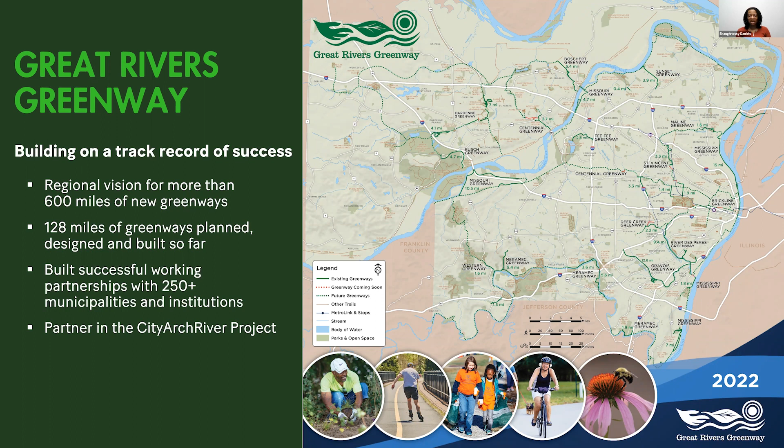The Brickline Greenway envisions not just a path, but a movement for the region. This project encourages ownership from everyone and focuses on inclusive planning and collaborative decision-making. With hundreds of partners involved in planning efforts, including you, community voices drive design. The Brickline Greenway is designed to connect us, bringing everyone to the collective table.

This is a project built by St. Louis for St. Louis, and it is built to have great impact in and for St. Louis, from quality of life and environmental excellence to being a catalyst for jobs and economic development opportunities. The Greenway intends to tangibly and concretely make our city and our entire region stronger.

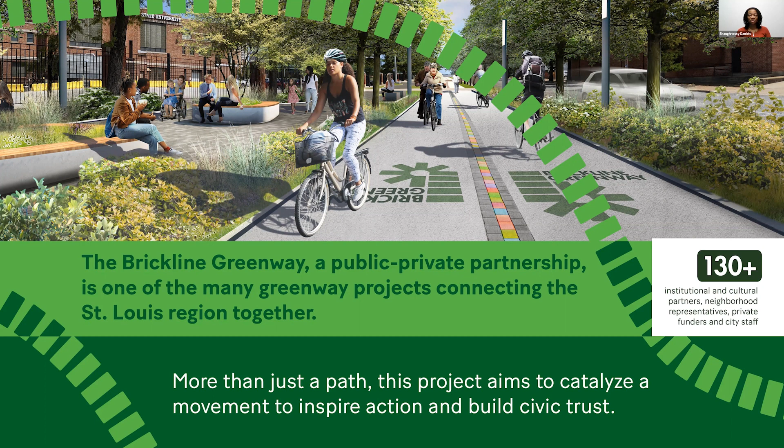The Brickline Greenway intends to connect Forest Park to the Arch and Fairground Park to Tower Grove Park, hundreds of destinations and 14 St. Louis City neighborhoods in between, with more than 10 miles of greenway. Great Rivers Greenway is in the process of planning, designing, and development of several segments, including the North Connector. My colleague Lonny Boring will tell you more about the Brickline Greenway North Connector.

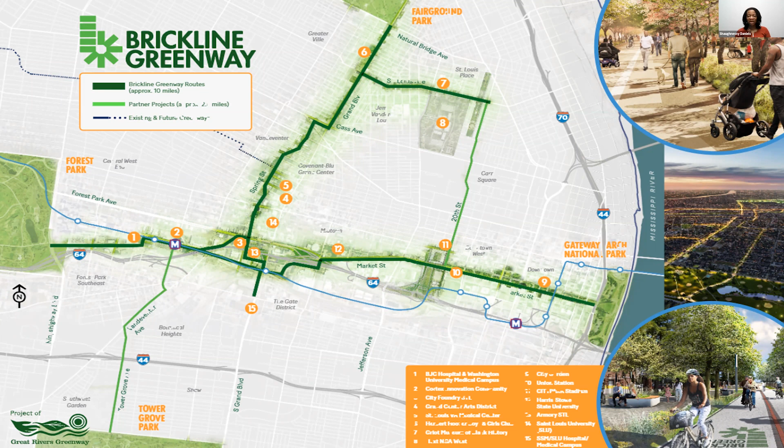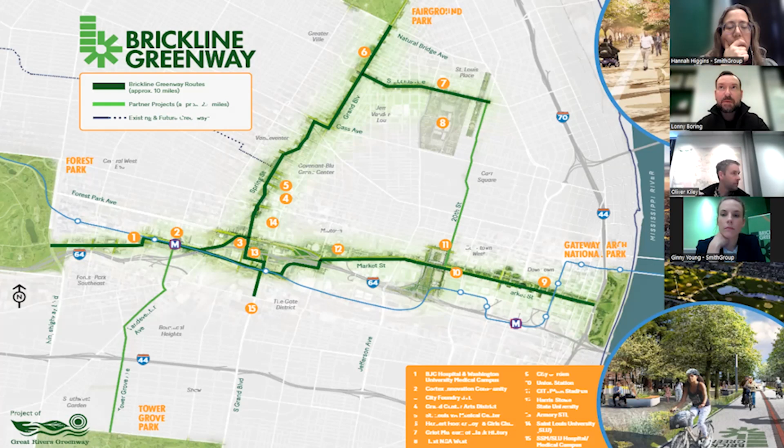All right, well, good evening, everyone. The North Connector project of the Brickline Greenway is one of critical importance for us, largely in part because we have so many multiple partners working in this area, and our extensive community engagement really highlighted this area as one of the first and early action items for the Brickline Greenway.

It begins at Fairground Park in the north, travels south on Grand Boulevard to Cass, where it makes a quick jog over to Spring Avenue before continuing south down Spring Avenue, eventually connecting with St. Louis University campus, and ultimately all the way to the Midtown area and the Grand Metrolink station.

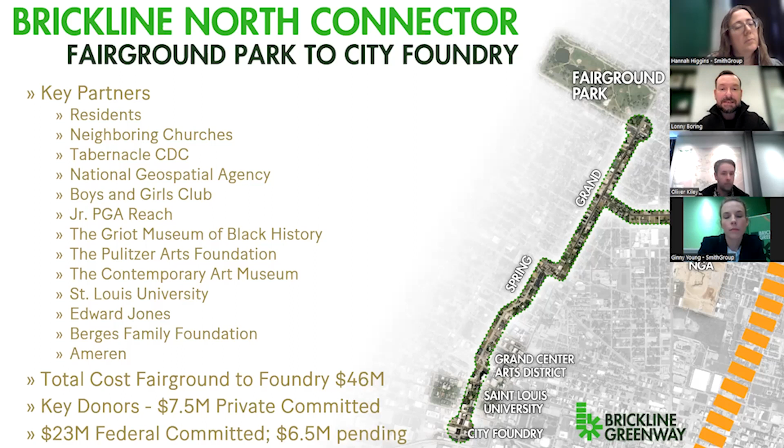A few of the key partners are listed here on the slide, and the funding for this project is coming together piece by piece. Total estimated cost in this corridor is approximately $46 million, but we've already had private commitments from donors totaling nearly $8 million, and we've been extremely successful in securing federal funds as well, with over $23 million committed to date. Next slide.

As we continue to assemble the funding for the project, happy to report that Phase 1 between Fairground Park and Page Boulevard was awarded $15 million in a federal program called the RAISE Grant.

So that was a great success for the project that came about in November of 2021. That created phases for this North Connector between Fairground Park and the Grand Metrolink station. But GRG and our partners have continued to seek out federal funds for those phases, and happy to report that...

Along Spring Avenue between Page Boulevard and St. Louis University, we've secured an additional $6 million in transportation alternative funding and $2.5 million for community project funding through former Senator Blunt's office. St. Louis Avenue is listed here. It's approximately $12.9 million. Thank you, Lonny.

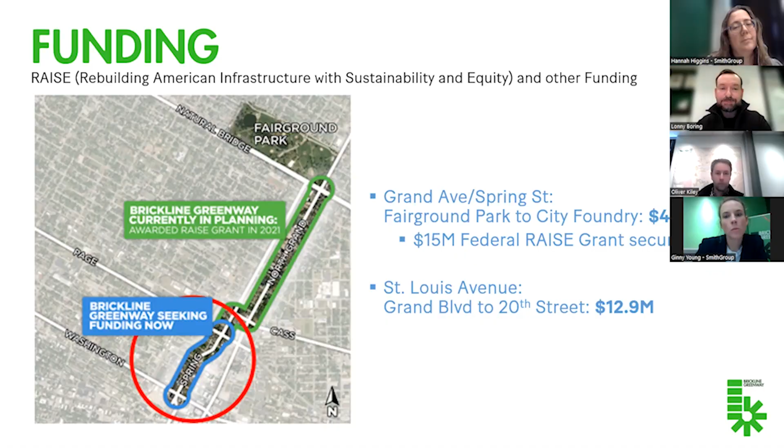Work in this segment was launched on an engagement platform. We have been in the community listening to your needs and concerns since 2020. We've engaged a working group and community advisory committee to help drive the work, and we continue to conduct regular engagement activities in the community to make certain people are aware of the project and have an opportunity to participate. I would like to acknowledge all of our former and current working group members and advisory committee members who have given so many hours of their time to see this project to fruition. Thank you all.

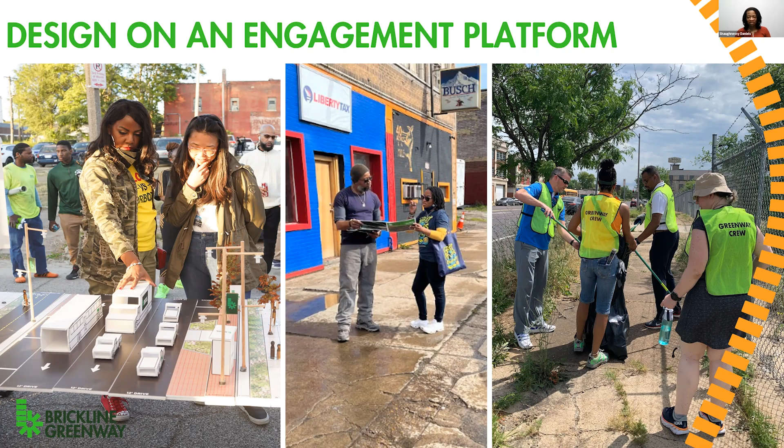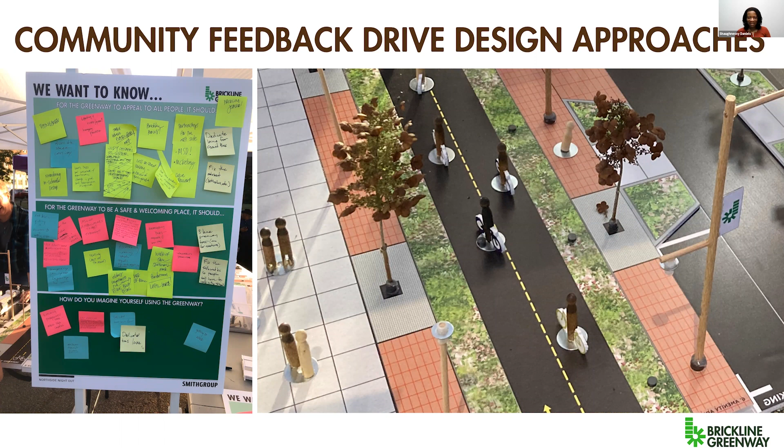Community feedback informs and drives design. What we hear from the community is the basis for the design team's work. This is why it is so important that we hear from you, not only right now, but throughout the entire Greenway planning, design, and development process and beyond. So without further ado, let's meet the design team and learn more about the design for the Brickline Greenway North Connector.

So let's talk about what we heard during this design process. Hi, my name is Hannah Higgins. I am a project manager with SmithGroup, leading the design for the Brickline Greenway North Connector. And we want to share what we've been hearing from everyone.

As Shaughnessy mentioned, we've had a lot of great events happen recently. We've had the Northside Night Out, we've had community mailers go out. We were even out having open office hours early in January. This is not stopping, this will continue on. We've got tonight's meeting, we have the online survey that was part of the mailer, and we'll continue to update that with new questions as the project moves forward. We've got some fun events planned for April, and we'll also come back to the community in June.

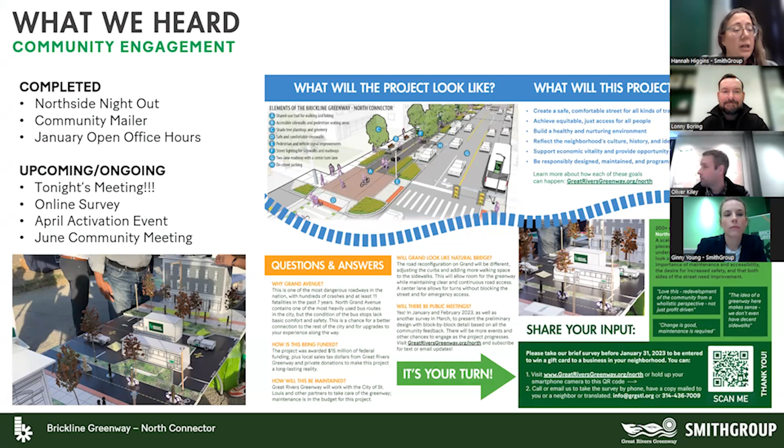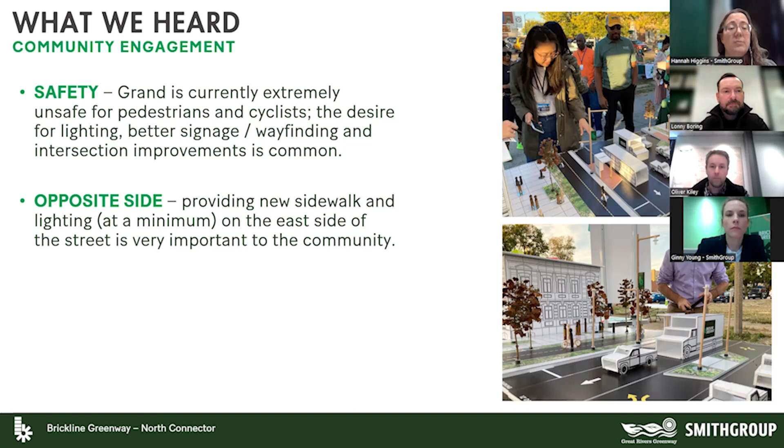So what did we hear in all these engagement events? The top topic has been safety. We understand Grand is a very hazardous street—one of the most dangerous in the country, and extremely heavily used, not only from a vehicle standpoint but also a transit standpoint. So the desire to make this better for pedestrians and cyclists, with better lighting and signage, these were very common comments. We also heard a lot about making sure we get improvements happening on the opposite side of the street—it's important to balance the improvements so the full corridor gets improved.

We also heard a lot about maintenance. Trees and landscape are great, and getting that green out there is definitely an interest—that was a common comment—but the key was that it must be maintained. That's an attitude we've evoked through our design, and we've also been working closely with GRG on how this will be handled in the future.

But going back to why this corridor—the safety and the connection. As I mentioned, Grand is extremely unsafe. A lot of asphalt, it's treated kind of like a highway, people tend to speed through here—a lot of issues. So we want to make sure we improve the safety and the user experience. Also, this is such a major connection, as Shaughnessy and Lonny talked about. This corridor provides a key link in the larger Brickline system and really helps connect all four major parks through the central city.

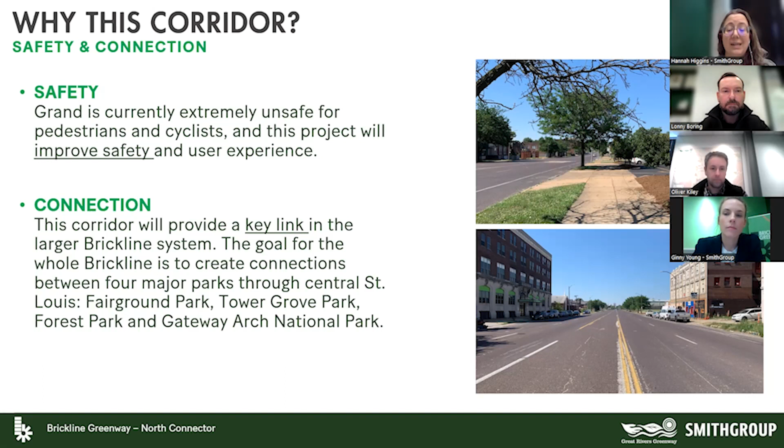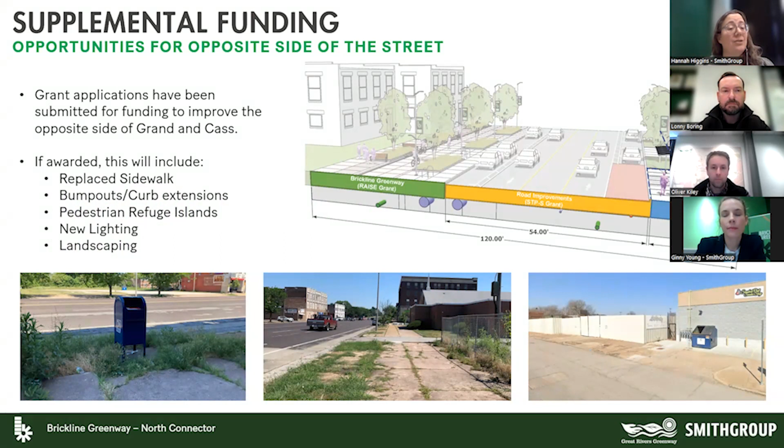One of the key things we talked about was equity and balancing it, and from the engagement we've had, how important it was to do the opposite side of the street. GRG, our design team, and the city of St. Louis have been working together on grant applications, and we've actually submitted a couple. We're hoping to hear back this summer to get funding to extend this. If awarded, we're hoping to do sidewalks, curb extensions, bump outs, pedestrian refuge islands, lighting and landscaping on the opposite side of the street through this corridor. So really excited, we're hopeful.

But let's now dive into what we're doing as part of the RAISE grant that Lonny mentioned, on the Greenway for the North Connector. I'm going to pass it to my colleague.

Hello everyone, I'm Oliver Kiley, landscape architect with SmithGroup, also part of the design team working with GRG on this exciting project. We want to provide an overview of the design, a high-level look at what the corridor could look like as we move along it. We're going to start at the south, south of Page Boulevard and MLK and south of Cass Ave, and work our way north. If you're looking at this map, north is to the right, where Natural Bridge and Fairground Park are. So we're going to start in the south.

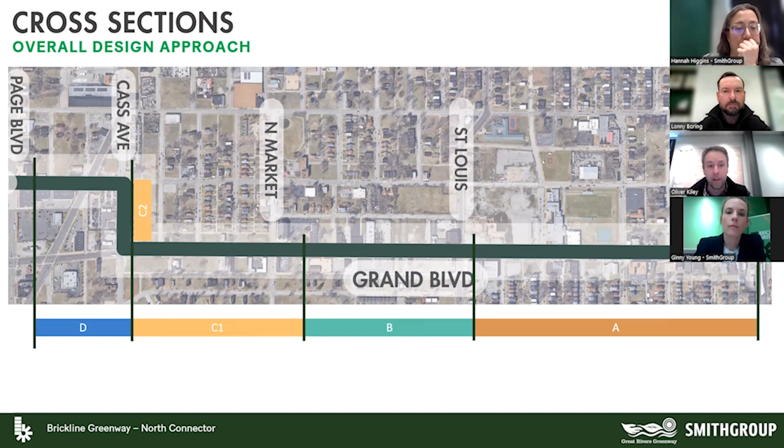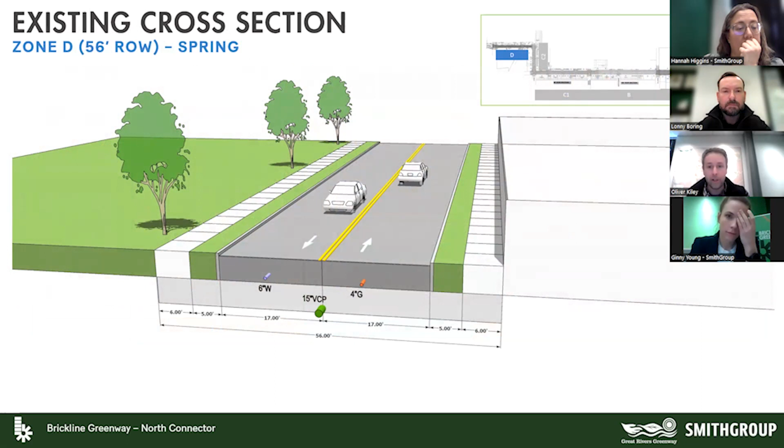This section of Spring is a fairly narrow section of street right-of-way. The right-of-way is the public space, usually from sidewalk to sidewalk. That's only about 56 feet wide along Spring Street today. As we look at what the Greenway could look like along this section of the street, you can see on the next slide what that might look like.

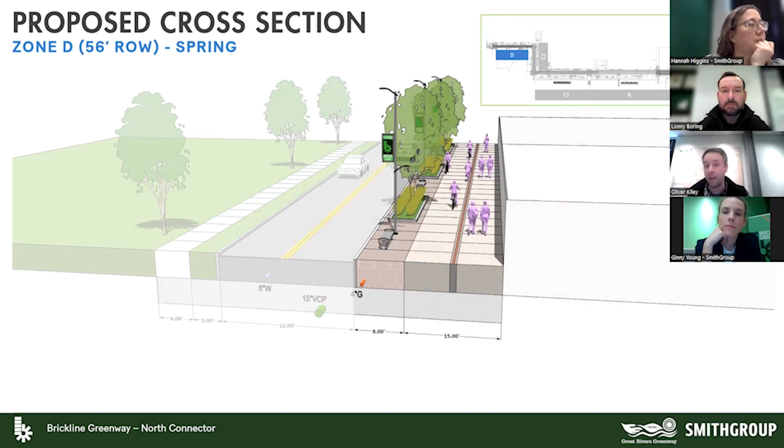So moving where the curbing is, creating a landscape and amenity zone, and then the trail itself can run along there. This would be designed as a shared use section of trail, a much wider space for both bicyclists and pedestrians to move along the Greenway. You can see from the image here, the Greenway along its length also includes improved lighting both for the street and for the Greenway side, landscape amenities like seats, waste receptacles, and special pavings that tie into the character of the Greenway.

As we head further north, we make that little jog that Hannah mentioned down Cass Ave and over to Grand. Cass Ave is a little bit wider, about 80 feet wide. This is a section of road today that has 4 travel lanes, 2 lanes in each direction. The outside lanes are really wide, and sometimes cars are parking in there. It's a lot of pavement space, though. So the design of the Greenway, we'll start to look at how that space can be reconfigured.

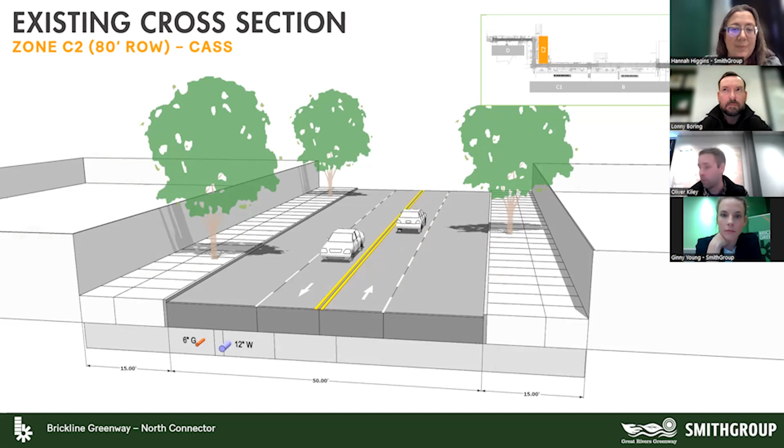Again, you can see as the Greenway wraps the corner, similar to Spring, there would be an amenity zone, and then the central part of the Greenway trail. One thing to point out on the Greenway: that darker color band running through the middle is a key signifier for the Brickline Greenway. You'll see as we move through these cross sections where that band of special paving is, as part of the identifier for this.

And just a note, on Cass Ave, on the opposite side of the street, there are improvements planned for this block if that additional grant funding is successfully awarded to this project. So that'll be able to do improvements to all of Cass Ave.

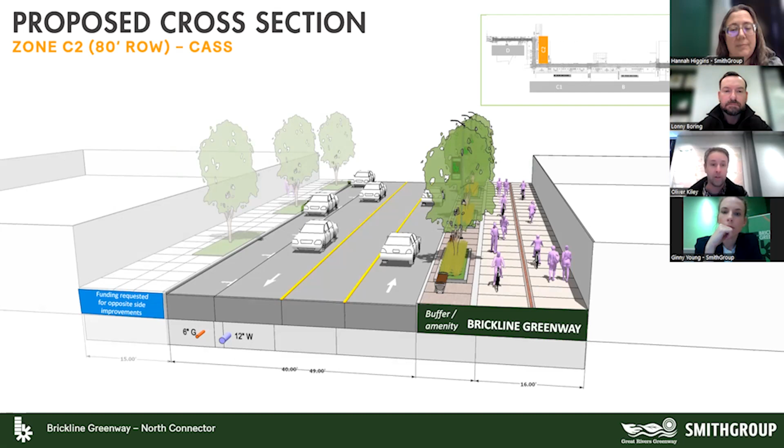Okay, next slide. So as we transition onto Grand itself, onto North Grand, it's important to recognize that this is a pretty distinct and also very unique corridor within the city. There's a lot of conditions here that are going to change along the length of the corridor, like the relationship of buildings to the street, how close they are. There's also lots of properties that are vacant.

And so how the edge of the Greenway changes as it responds to those different land uses will be important. Along Grand Ave, as Hannah had mentioned, this is one of the most heavily used transit corridors in the city, so we want to make sure people have comfortable access to bus stops on both sides of the street. That'll be critical. There is parking on street on many sections along here. There's alleyways and driveways crossing the Greenway along Grand that we need to be mindful of. And one of the other major considerations is that there are major underground utilities along Grand that are also going to be driving and dictating the design of the Greenway and of the whole street and how it changes along the corridor.

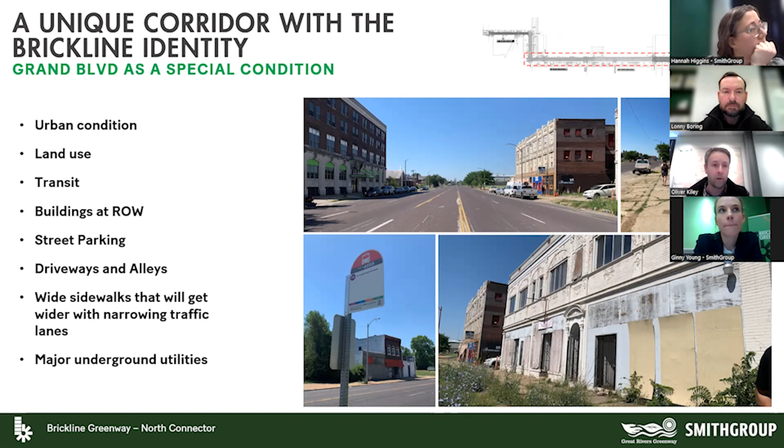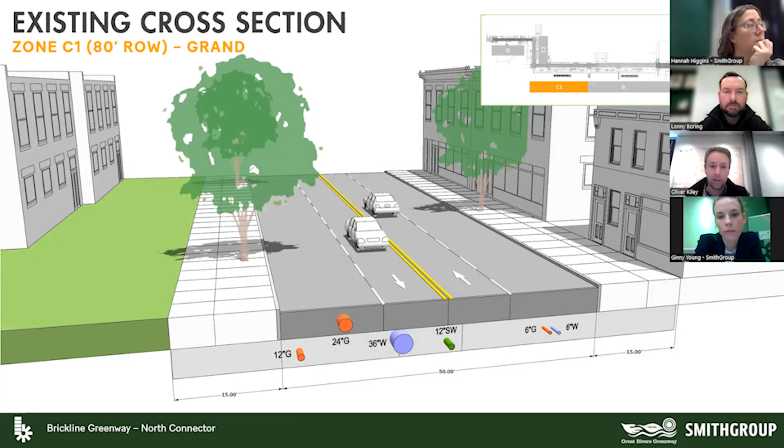So as we head north from Cass, this first section of Grand Ave is also 80 feet wide. You can see what that existing condition looks like today. And those colored tubes coming out from the bottom of the image, those are all different utilities - water mains, gas lines, stormwater drains. So a lot of those utilities are things that we have to be mindful of and be working around as we look at the design in the cross section of the Greenway.

But what's proposed here is what you see on the screen now. The idea with this is that we are essentially establishing two kind of parts of the Greenway, from what's normally the sidewalk all the way out towards the road curb. That brick centerline band goes through the middle of this whole Greenway section. On one side, you have kind of the local route - think of it in expressway terms - where traffic might be a little bit slower moving, so people can get access into buildings and adjacent properties. You have that amenity zone in the middle that provides space for shade trees, seating, landscape, and lighting. And then you have the wider kind of express lane for the Greenway that can carry more of the through traffic for people moving along the corridor, with a small buffer zone between that and getting out to the roadway.

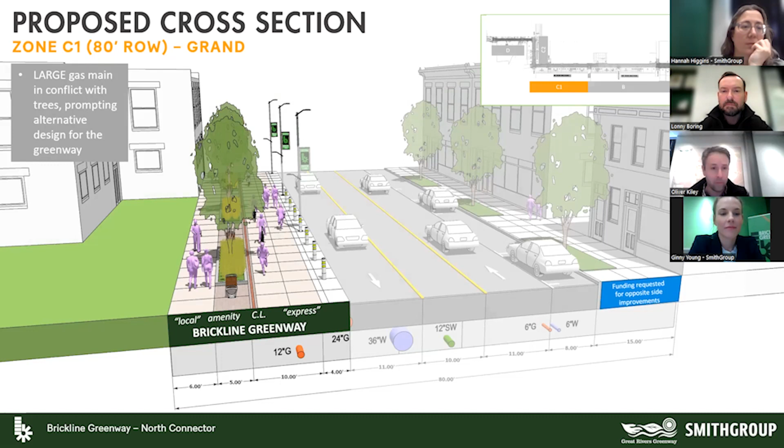And again, you can see on the opposite side of the street that if the additional grant funding comes through, there's opportunities for streetscape, lighting, and sidewalk improvements on that side of the street as well.

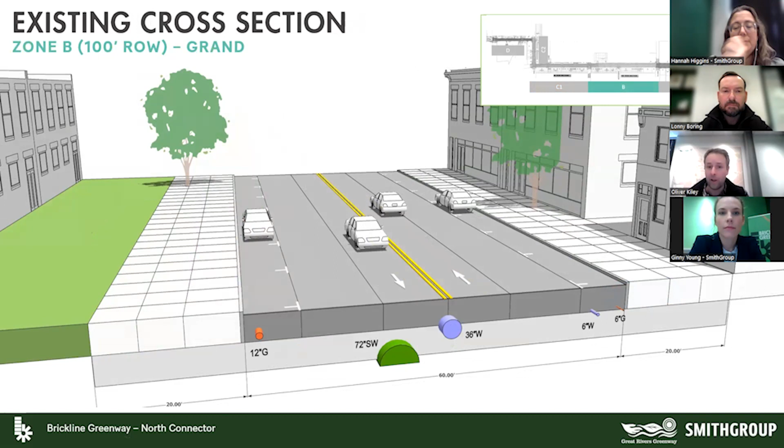Okay, so as we move forward, similar kind of pattern, but we are now widening out to a 100-foot right-of-way. You can see here there's a very large storm sewer and sewer underneath the roadway there. The sidewalk space today widens out. The road is still generally 4 travel lanes with now kind of room for parking on both sides of the street.

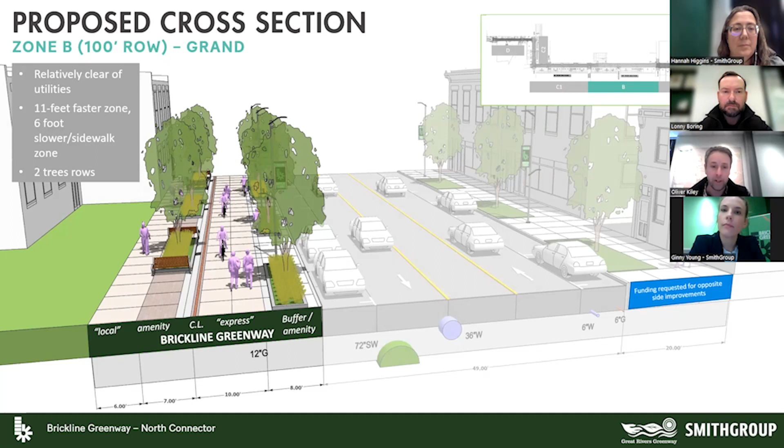So when we get to the next slide, which shows the proposed Greenway design, you can see how that brick centerline kind of goes through the center of that whole Greenway zone. You still have the idea of the local and the express lane with that amenity zone in the middle. But as we have more right-of-way space, we're actually able to now pick up a second row of trees that provide additional buffering and separation from the roadway. The roadway itself along all of this project along Grand would be reconfigured down from its 4 lanes today to 3 lanes, with parking generally on both sides of the street, as you can see here. And of course, potential improvements on the opposite side of the street if that funding comes through.

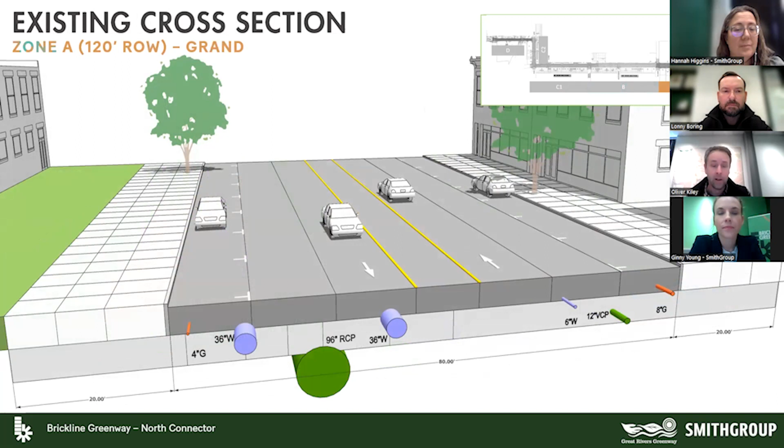And then lastly, the section furthest to the north. This takes us up from essentially St. Louis Ave north all the way up to Natural Bridge. This is a very wide section of road corridor, 120 feet wide. You can see kind of what that is looking like in its existing condition today, and then in the proposed condition in the future.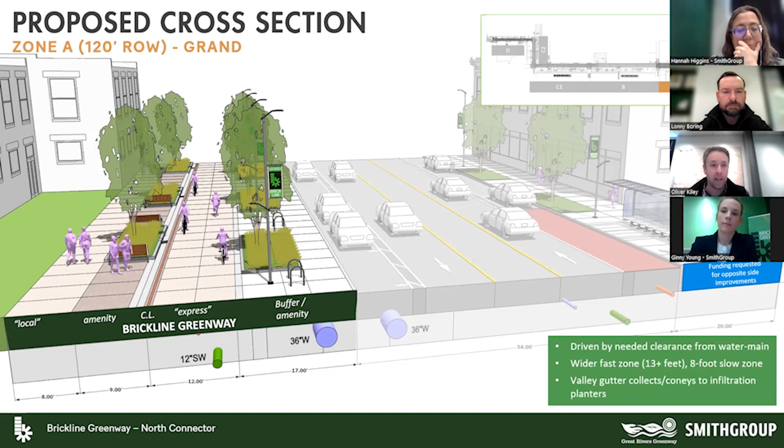And then just a note about the overall design too. You see right to the left of that center line, what we call a valley gutter. So a lot of this area, the storm drainage will actually drain down into that line and help direct water into those landscape planters that can help collect, store, infiltrate, and help manage rainwater that's falling within the Greenway zone, and manage that in a more sustainable fashion.

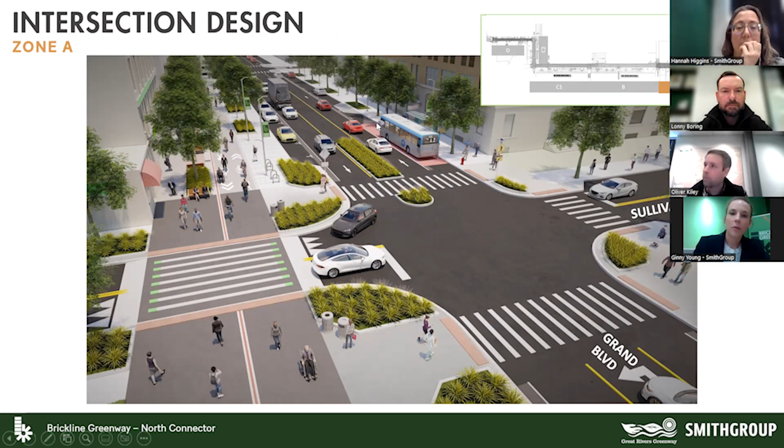So you can see raised crosswalks that will slow through traffic on those side streets, pedestrian refuge islands for pedestrians and cyclists crossing those multi-lane streets on Grand. You can see some of the hints of wayfinding and trying to make it clear for cyclists and pedestrians actually in the paving. And you can see the bus pull-off zone there as well, so that the buses can pull to the side and are out of lane for boarding and alighting.

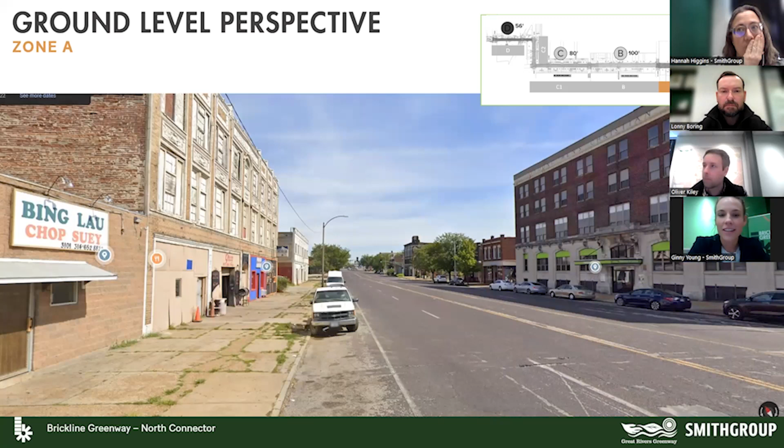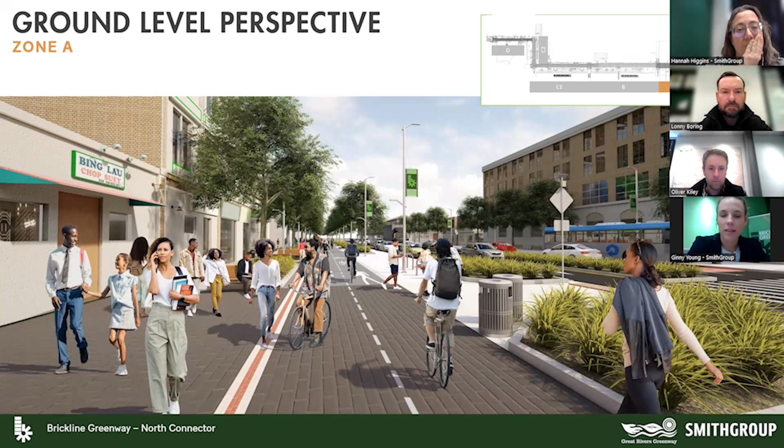We also wanted to show you, as a potential user of this design, what it would look like on the ground level. So this is the existing conditions, and this is a photorealistic rendering of what this might look like in the future. Obviously we're still in design, so some of these components and paving colors and things like that are subject to change, but from a user perspective you can get an idea of what the space and what this greenway might start to feel like.